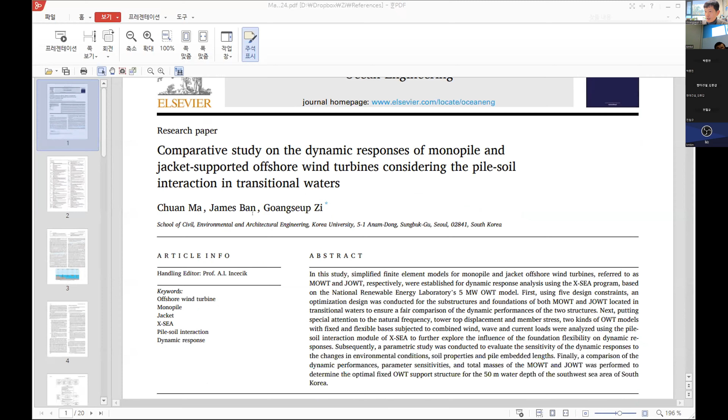강의 전에 X윈드를 사용해서 실제로 국제 논문에 발표해서 게재한 논문도 이 채팅방에 올려놨습니다. 다운을 받으셔서 실제 어떻게 사용했는지 한번 보시면 이 강의 외에도 부가 자료로 꽤 유용할 것 같습니다. 여기 논문에서는 통합하중 해석을 해서 고정식 구조물을 분석을 했고요. 구조물하고 기초를 따로따로 할 수도 있고 아니면 구조물하고 기초를 전체로 다 모델해서 지반까지 모델도 할 수 있습니다.

아까 말씀드린 대로 X윈드에서는 고정식도 할 수 있고 부유식도 할 수가 있습니다. 고정식은 검증 작업이 다 끝났고, 부유식은 검증이 남아있습니다. 이 논문에서 했던 거는 그림 6번을 보시면 되는데, 기초가 없이 고정된 타입하고 구조물하고 기초가 같이 부가된 타입하고 이 두 개를 모노파일하고 자켓에 대해서 전체 통합하중 해석으로 거동 분석을 했던 논문입니다.

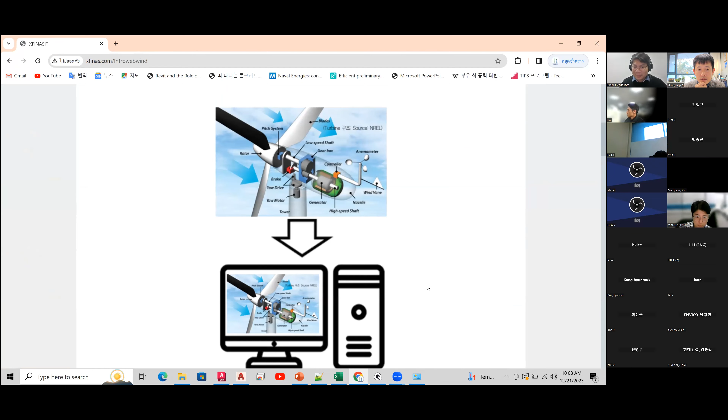Inside our website, there are some references you can access to download the presentations or the updated version of the tutorial manual of this demonstration. By the way, on the first or second page, there are details in the Korean language, so it can be easily understood clearly.

So let me turn to the homepage of our website. At the homepage, there is a link that you can use to download the program via GitHub. After you enter that position, you will see that I already provide the Xwin application version 2.01s.

So you can download it and extract the file into the storage folder. After you extract into the storage folder, for example, I already extracted it into the XC here. Please open up

some AutoCAD software and navigate to create a new drawing sheet. Please type netload at the command line and press enter.

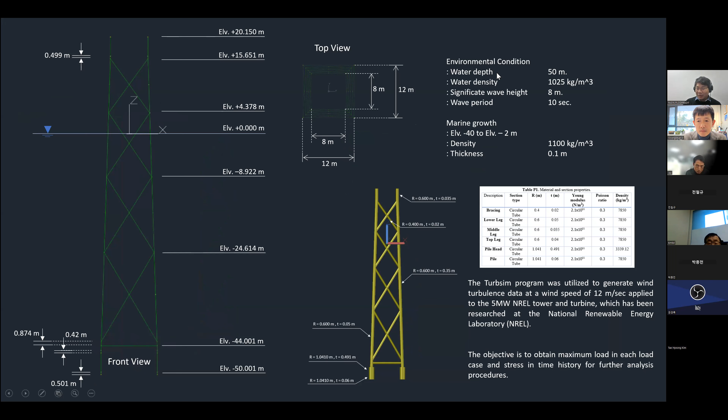This structure will be responding to the wave kinematics with water depth 50 meters, water density 1025 kilogram per cubic meter, and significant wave height allowed 8 meters. Wave period is 10 seconds, also including marine growth starting from elevation -40 to elevation -2 meters, with density 1100 kilogram per cubic meter, and thickness 0.1 meter.

So there are 2 types of material property and 6 types of circular tube section as shown in the table, classified by bracing, lower leg, middle leg, top leg, pile head, and pile.

The TurbSim program will be utilized to generate the wind turbulence data at speed allowed 12 meters per second, and applied on the tower and the turbine.

This kind of data will be published by the National Renewable Energy Laboratory, or NREL. The objective in this demonstration is to obtain the maximum load and stress in the time history for further analysis, such as FLS or ULS analysis.

So I think let's go to see the first look of the X-WIND program by running the AutoCAD software. I have 2 versions of AutoCAD, maybe I will use one version to start with you first.

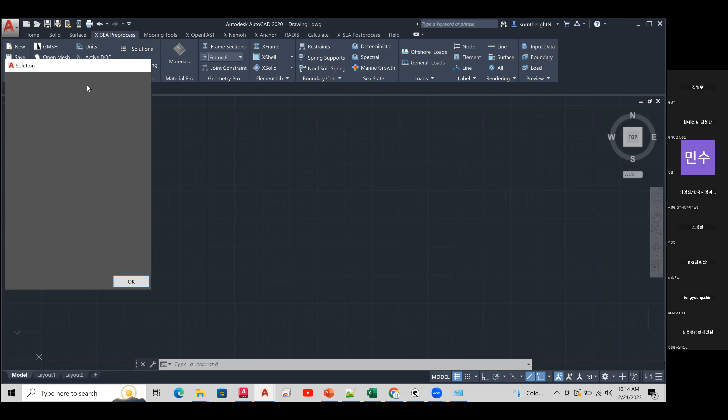We have many kinds of solutions from the analysis, like linear static, nonlinear, natural frequency, linear buckling, or many more. In this demonstration, we will use the open fast analysis, which allows the user to assign material property sections or group sections into lines of elements, and assign boundaries.

Okay, let's get back to the 2023 version. I think this is better. I will leave this one to be another work.

Before you start creating the model, you need to ensure the unit systems in AutoCAD are correct. Type the unit command and press enter. You can see that initially the unit inside AutoCAD is set as inch. That will cause a problem when we try to create the model I provide in the tutorial, because that model belongs to the SI unit and meter. So you need to change the unit to scale in insert content to be meter. Press OK to confirm. Finally, we already have it - this drawing sheet is considered to be in meter units.

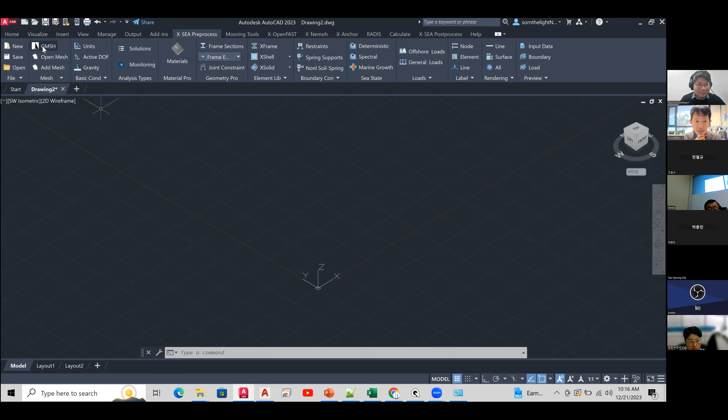Let's talk about modeling. We have three kinds of modeling methods inside the tutorial. The first is Line tool, a straightforward approach for generating lines using AutoCAD as provided in this demonstration.

You can navigate to the Home tab and select Line. As you see, it will request you to specify the first point. After you input something for the first point, it will request the second point. Or you can drag and drop it on the screen as you want.

To construct the whole jacket structure, we have allowed 112 lines to construct it.

I already have provided this in the appendix. Dr. Pasin? Yes sir. Sorry to interrupt - can you slow down the speed of your lecture progress so people... Okay sir, yes sir, if you go too fast I have difficulty following.

Okay, so let me repeat again about Line tool. Especially when you navigate between different options, you should navigate to the Home tab. This is the first method for the modeling technique - a very simple method, but much more difficult to complete the whole structure this way. You can navigate to the Home ribbon menu of AutoCAD and select the Line icon.

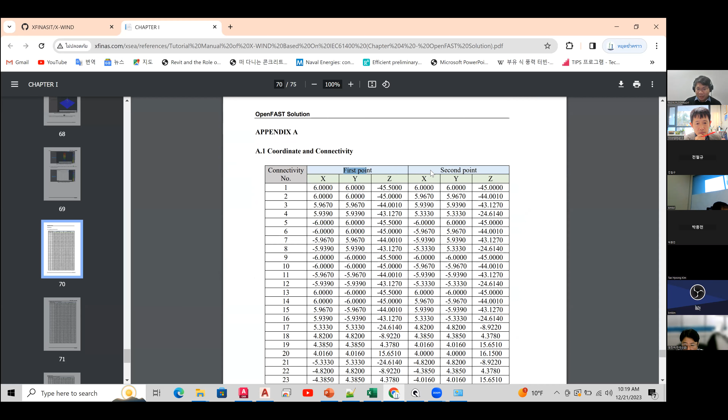But for the whole structure, if you try to use this kind of method, there are 112 elements. In Appendix A1, page number 70 in the updated version, or page 66 in the old version, I already provide the first and second point coordinates. You need to fill up everything to complete the drawing - that means 112 lines to complete the jacket structure. This method consumes a lot of time, so I do not recommend it for this demonstration.

I have another, second method. The second method is to use the AutoCAD command to construct the specific model by using AutoCAD. So you can go to Appendix A2.

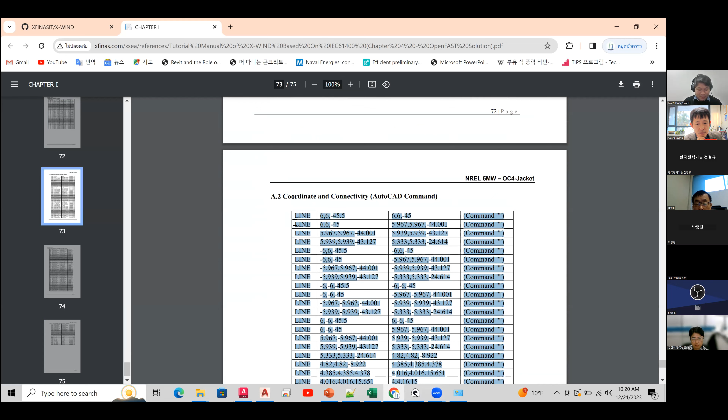You can see they have contained around 3 pages. Easily, just copy the whole of the first page. By Control+C, and then go to AutoCAD. You can see it on the command, and press Control+V. Now the jacket model starts to make automatically. After you finish, just press ESC to cancel or escape.

So you need to fill it up with page number 2 and page number 3. This is page number 2 for the command to make the drawing. See that? Now this is almost completed. Let's go to page number 3.

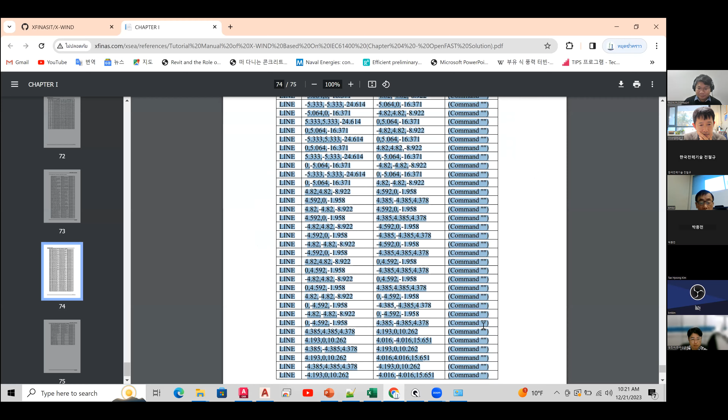So finally, we already got the completed one on the jacket model. By the way, an additional method is the third method. We use the jacket template, but please do not follow me in these steps, because you already have the model, and we would like to go into the classic method, not the advanced one. This is more simple and easy, so we navigate to the X-SEA Preprocess ribbon.

Please do not follow. Can you see it's on the file category? Extend the file category - we have the template extended. It will include the jacket template, monopile, tripod, and tetrapod. Can you hold a little bit? I'd like to explain what the current stage is.

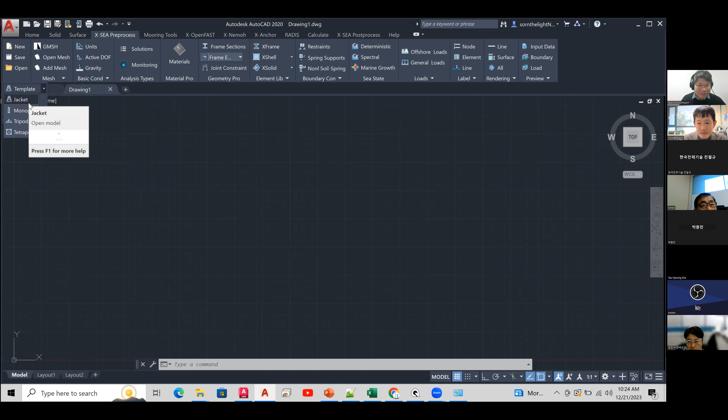Okay, let's go the very simple way to build the jacket, relying on the manual detail. If you refer to the manual, page 10 for the new version of it, 01 is...

should be 6. You can see that I already provide information to make the jacket by using the template. So if you follow this kind of table, you can build the jacket easily by putting the number of stories equal to 11. Base width is 12, offset is 2. Then you should fill up all the table on story number 1.

Let me fill up everything and I will show you.

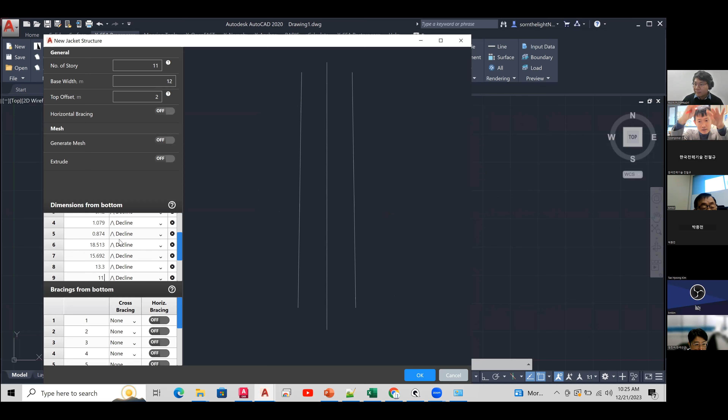Okay, let's make a straight line on the floor, number 1, 2, 3, and then 10 and 11. So we create the horizontal line to floor number 4, and cross number 6, 7, 8, and 9.

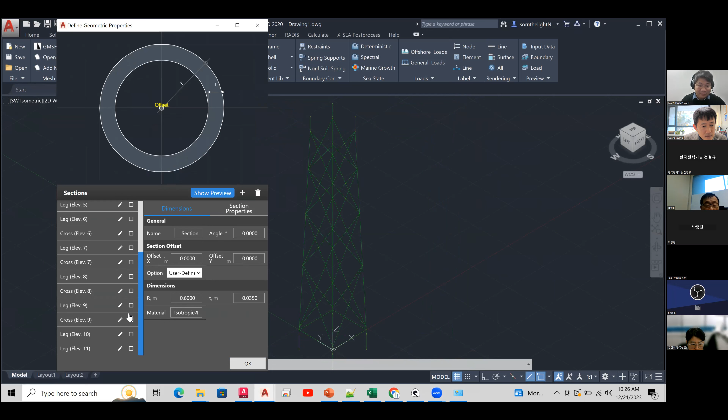So now we already complete the jacket model by using the template, and can pass it to the mesh by using the count number 1 and create it. So finally, we already have the jacket modeling, and it automatically inserts the data into the geometry side. That means the list of details in the geometry section will be initialized, but you can modify it later.

Okay, this is the third method, but by the way, we need to go to the classic one. I will close this one and use the 2023 version instead. So I think everyone has already completed the model.

To generate the mesh, we need to select the entire model that we would like to generate the mesh for, by using GMSH. Navigate to the X-SEA Preprocess, move it to the mesh category. As you see on the first icon that they show on GMSH, click for that.

Can see that the model that you modeled in AutoCAD will be loaded into the GMSH software. On the left panel, they have the data tree to control the mesh size and define many things more. Please extend the mesh, extend define, and extend transfinite. Now we get to the curve.

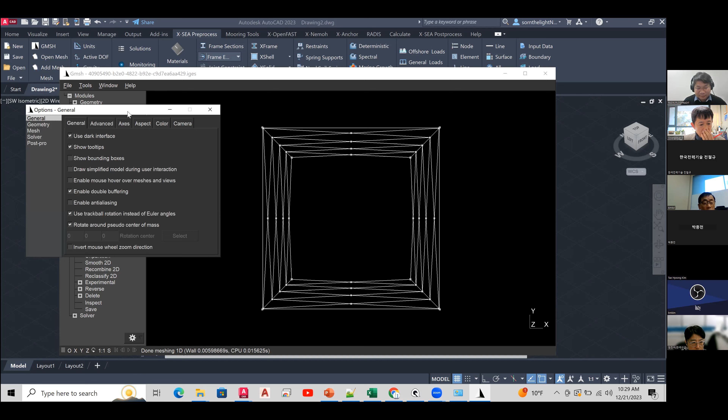They have the mesh. See the element label. That means the number of the mesh has been generated completely. Or we can check by the node label also.

Okay, if everything has been confirmed, close it. Navigate to the file, save mesh.

So we need to turn off the program by navigating to the files once again and quit it, or you can close directly.

So we need to open the mesh that we have generated. Navigate to the X-SEA Preprocess ribbon, and you can see it's on the mesh category.

They mentioned our icon name, open mesh. Click that.

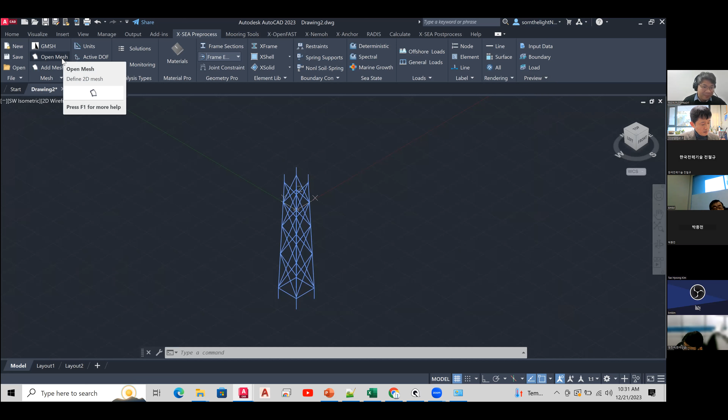The model has been drawn completely with 64 nodes and 112 lines.

Okay, let me summarize up to this point. Yes, sir, so you built the computational mesh now. So you have space for the finite element meshes at this point.

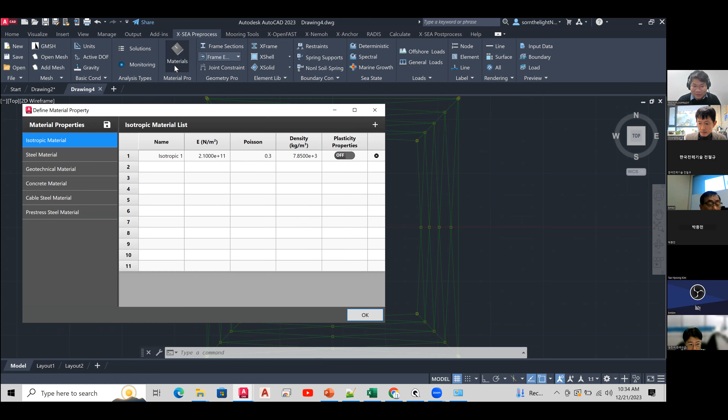In the isotropic, we already initialize the first value of the material. You can add one more.

You can see it's on the top of the screen, they have the plus symbol. Click to add one more material property.

You can fill it up here or in the table, it doesn't matter. For example, I will fill or change some value in the table. That's why I just insert the data here.

Change the isotropic name as you prefer. I will change it to just read number 2.

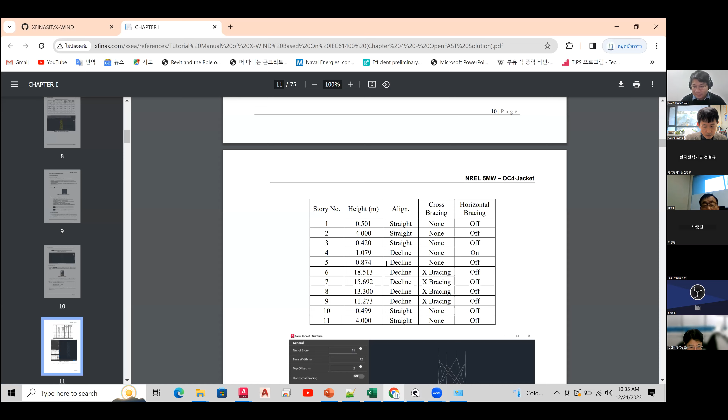With their second, density has been changed to 3339.12, as referred to the tutorial on page 17.

Because that is still unchanged, by the way, the Young's modulus elastic is not changed, and the Poisson ratio is always 0.3.

Okay, I assume that everyone has finished. Just cross or press OK, it doesn't matter.

Next, we will go to assign some section property. Navigate to the frame section at the geometric property category. Click on the frame section.

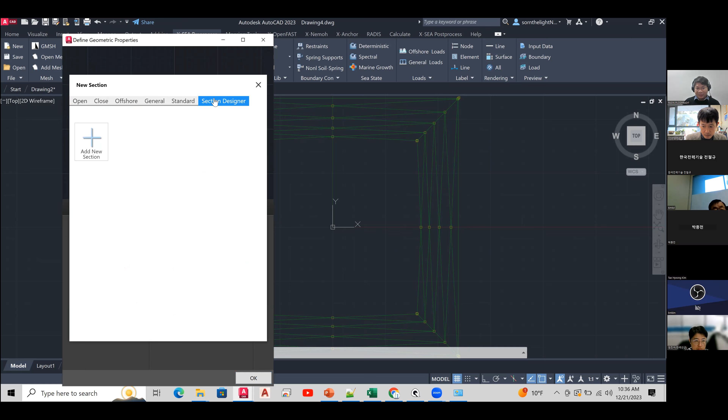You can see that we have many types of section property: closed, offshore, general section, or the section designer. In this jacket, always use the circular tube.

That means go to the cross section, navigate to the circular tube, and click it. The first thing they will request is

to input the names, so we can use any kind of name that we want. For the first section, I will follow the table I have been using in this tutorial. You can see it's on the table here: the first name is bracing, second is lower leg, third is middle leg, fourth top leg, fifth is pile head, sixth is pile.

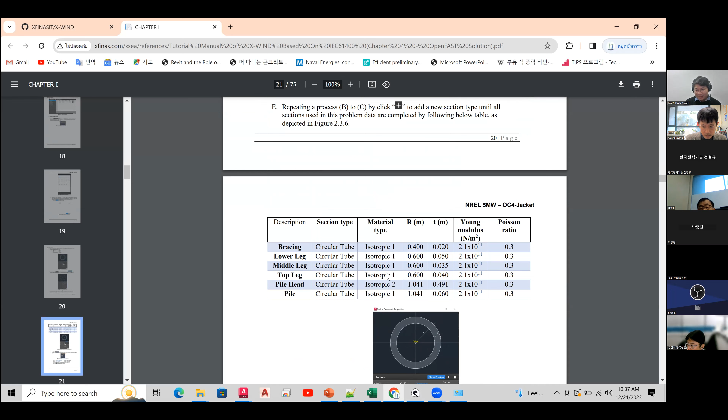I will change the name to the bracing. Press OK to confirm the name of the section. Here you can put the radius. It should be 0.4 for the first one, and the thickness is 0.02 meter.

After you input until this step, on the middle of the screen, not the top one, you can see the show preview option. After we click on show preview, it shows the real section shape, and you can also hide it.

Below that, they have the dimension and section property. You can double check by clicking on the section property, to check the properties of this kind of section, like area, torsional constant, moment, polar moment, and first and second moment of inertia.

To add one more circular tube, where it's located near the show preview and hide preview, there is a plus symbol. Click there, choose cross sections once again, and navigate to the circular tube.

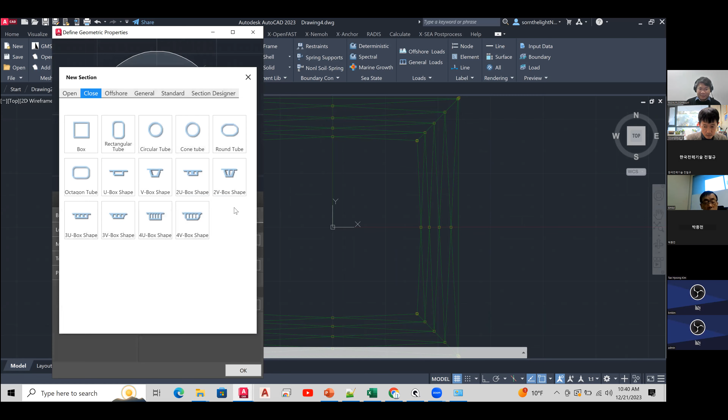Next is this last one for the pile, with isotropic 1, radius 1.041, and 0.06 thickness.

So everything now has been completed to define the geometry property. You can close and terminate this window.

I will navigate to the X frames so we can assign properties to the lines of the model we have done before. Please navigate to X frames in the category of the element library, and you can see the X frame there.

I will start assigning from the bottom to the top. That means X frame 1 has been defined as the pile first. Choose the cross section to be the pile.

Then we need to rotate the model a bit to make it more clear. We go to the top of the AutoCAD working screen and change to the southwest isometric view. This is more clear for me, but it depends on you guys.

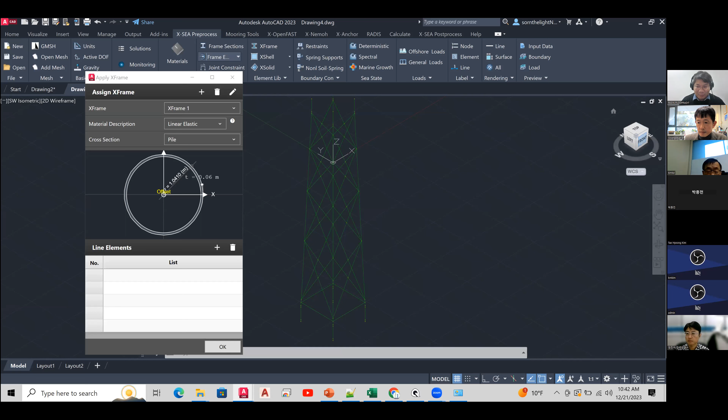On the right-hand side, there's a cube that can be rotated with the model. I will change to the front view instead, then zoom in to the model at the pile. You can see the yellow box that refers to the node.

To group up the pile, you can use the AutoCAD tool by dragging from right to left. Select just the last bottom line. If I rotate a bit, you can see that 4 lines have been selected. That's why I rotated to the front, it's easier to work on it this way.

Go back to the apply X frame window. You see the line element, in the middle of the screen, on top of the table, there is a plus symbol. We need to add the data here by clicking on the plus symbol. Now line number 1 until 4 have been added into the table.

Let's create X frame number 2. On top of the assigned X frames, we have a plus symbol. Click that to create a new one. You can change the name to whatever you want, but I don't want to change it, I'll just use X frame instead. Press OK, and they will request to assign another.

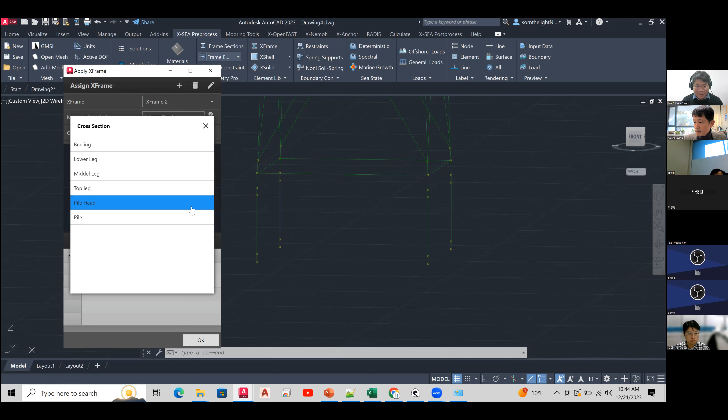Choose the section to be the pile head. Let's turn back to the front view. The pile head location is next from the pile. It's the same thing, we select the 4 elements and add it into the table list.

Okay, now next we move to the X frame number 3. Choose on the top leg. Sorry, should be on the lower leg.

Turn back to the front view and zoom it up. You can choose this kind of the 2 leg and more here on the top of it. Rotate a little bit. Choose on the...

1, 2, 3 more, 4 more. That's mean the total in this lower leg have include around 16 element or 16 line. Add it into the table list.

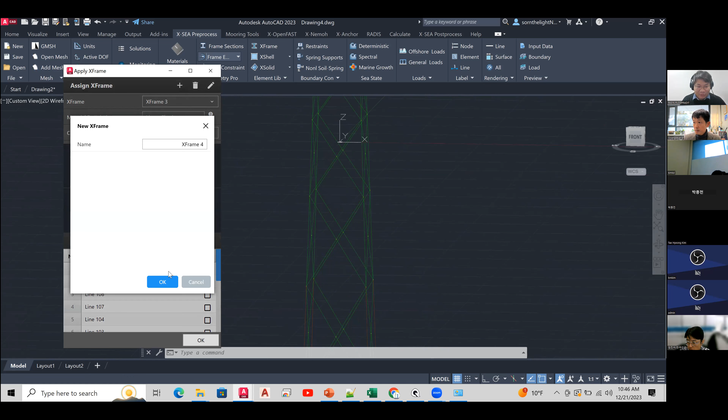Okay, let me shift it, move up. For the middle leg, additional for the X frames, choose on the middle leg of the cross section. This middle leg we need to shoot by ourselves because we cannot use the front view.

If we choose use the front view, it will be select on the bracing. That means we need to select 1, 2, 3, 4, up. Another story. And 4 more, almost near the top.

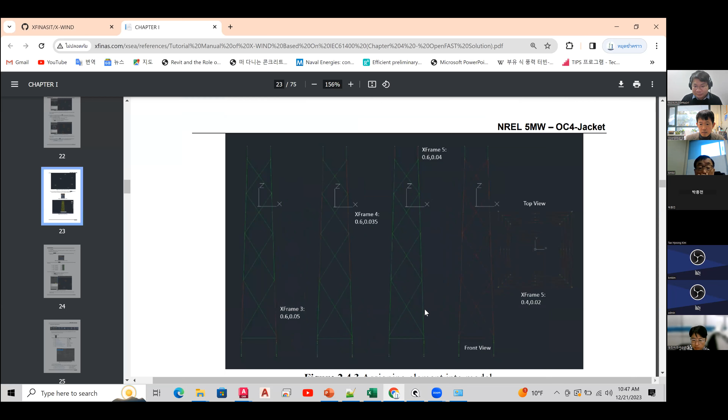Actually, if you see it's on the tutorial, I have been provided a location that you can select easily here, by its location to be point to the X frames of the bracing lower leg, middle leg, and top legs or so.

Add it into the table list. We move to the X frame number 5. That's mean shoot on the top leg.

So finally, we go to the last one of the X frame. Choose on the bracing. That means they already selected for me because they initialized for the first one. Choose on the bracing. I use the front wheel to select whole.

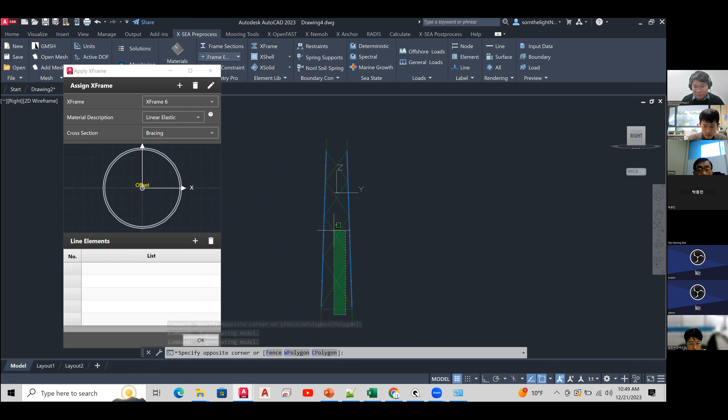Rotate it by using the right. Choose once again. Okay, that means whole of the bracing has been chosen. Add it into the table list.

Up until now, if everything has been done successfully and has been complete 100% without the problem, you can close the window. Go to the rendering window forms, that category inside the rendering.

You can see it's on the line. Navigate to that. Click it to be rendered about the 3D shape. If shapes have been corrected, it will be rendered like this kind on the screen.

On the AutoCAD, they provide some kind of option to see the view very clear. Left-hand side of the screen, they have the 2D wireframe here that is belong to the AutoCAD. You can change to any kind of the display, like a realistic. That just mean much more clearly to see it.

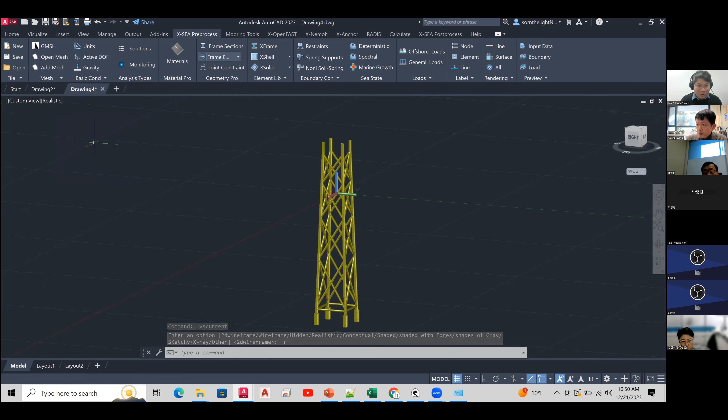Or the shade of the gray. Okay, let's go back to the 2D wireframe and turn off by clicking once again at the line. So it's almost final in the X-SEA Preprocess.

The last one is the boundary condition that we need to enter for the fixed offshore structure. Let's back to the right for me. Navigate to the boundary condition category.

Can you see it's on the top of the icon? They refer to the restraint. Click that window up.

We need to lock the translation and rotation because this is the fixed offshore, by turn on U constraint to be locked V, W, X, Y, Z.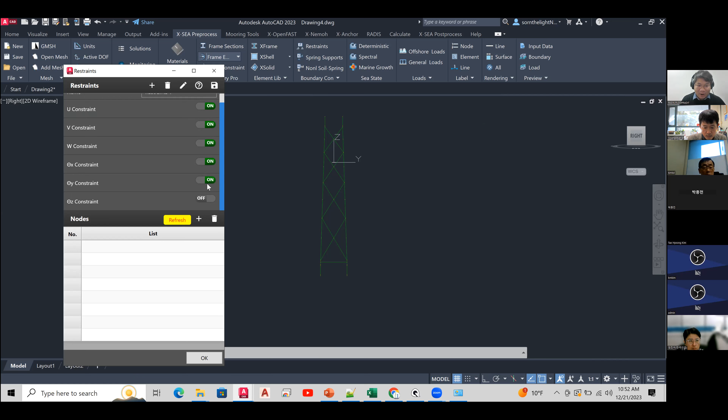Zoom up to the bottom of the structure. You can see it's on the node with the yellow color, rectangular yellow color. That is the node. You can group it.

That means two cones refer to the rotation. One cone refers to the translation.

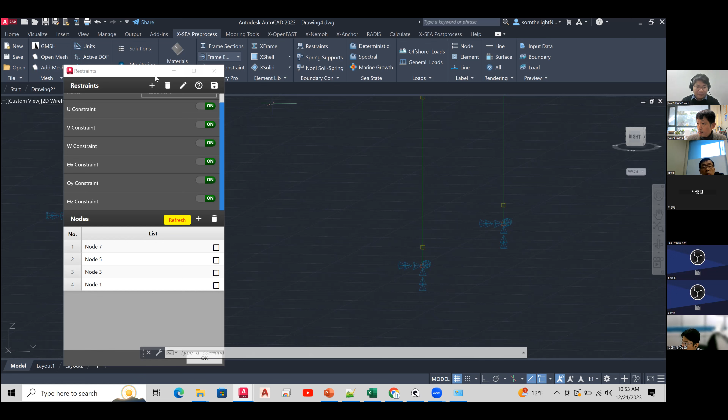Okay, finally, everything has been complete on the X-SEA Preprocess. We can move to the X open fast. Let me just return to the original wheel.

Now we get to the X open fast ribbon menu. After you click it, they have a lot of the icon in the front of it. You can see it's on the pre-process first. Normally, the pre-process of the OpenFast will be controlled by the primary control.

The primary control has used to be control the main solution and control about the file system that used inside the couple analysis. So the first other thing we need to define on the primary control.

They will separate on the right-hand side and the left-hand side. The right-hand side is used to insert the data and choose some kind of parameter. The left-hand side is some kind of category in this icon, like on the primary control, we have allowed 5 categories to be filled up.

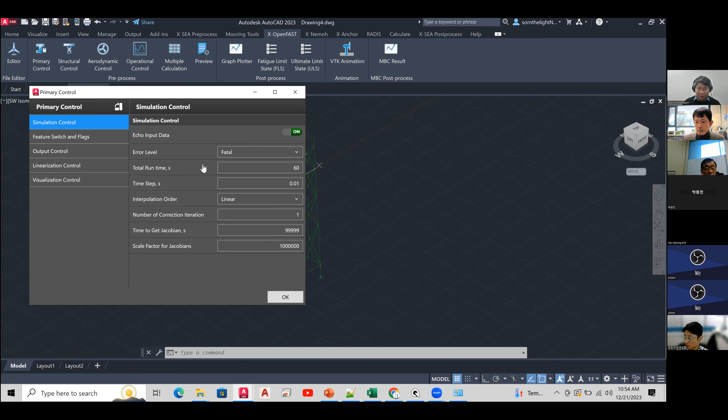So first, go to the simulation control. You need to turn on the echo input data, that means it will be within the results. I recommend choosing the error level as fatal, because if you use the warning, it didn't break the program and didn't show any kind of message much. The fatal option is much better to break the program and show the error when you try to analyze it.

Total running time, I recommend nowadays just 60 seconds is enough. And the time step for the analysis on the wind turbine, now just 0.01. Choose the linear interpolation order as quadratic. Number of correction iteration times Jacobian, you can leave as it is.

So if you cannot follow, you can go to our manual that is online in detail. Here, we go to the primary control. That's what we need to choose.

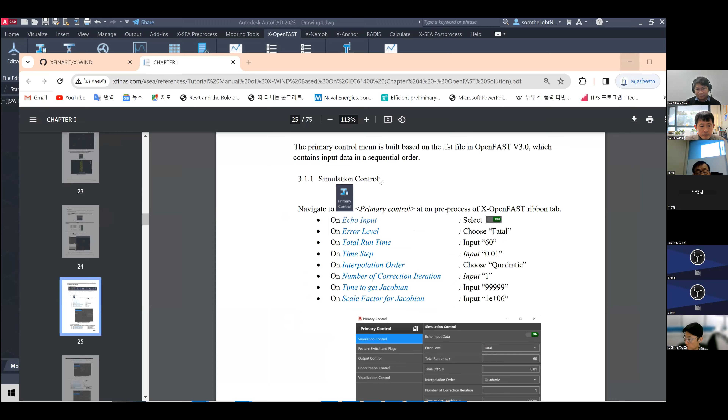Next, feature switch and flag. This is the main control for how many modules you prefer to use. Compute structural dynamic - we always use ElastoDyn because ElastoDyn always controls the tower and the main controlling for the turbines and nacelles also. We need to turn this on and choose ElastoDyn. Normally that's already initially set for ElastoDyn.

Second is the inflow wind velocity. We use the turbulence data from TurbSim. Please choose the inflow wind.

Aerodynamic - this is the 15 version. Yeah, just a single one that we need to turn on. And ServoDyn should be chosen, that is the electrical driving system or gearbox data.

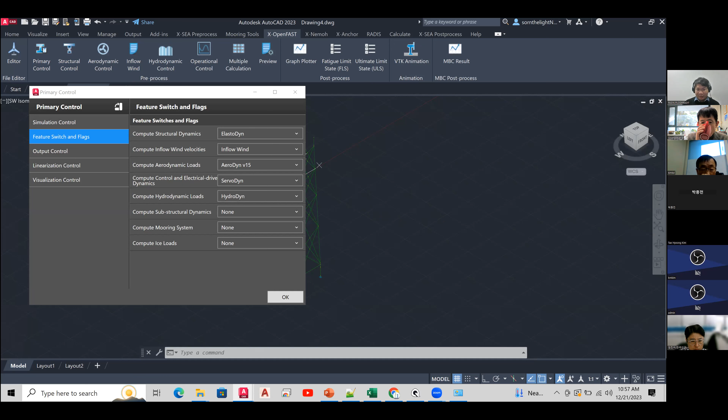On the compute hydrodynamic load, please choose HydroDyn because we need to consider the wave kinematics. We have the substructure, right? The module we use needs to be requested on SubDyn. So the mooring system is not required and the ice loads also, because the mooring itself connects to the floating structure and the ice load - we didn't consider that in this demonstration.

Can I break at this moment? Yes, sir. To summarize what you say.

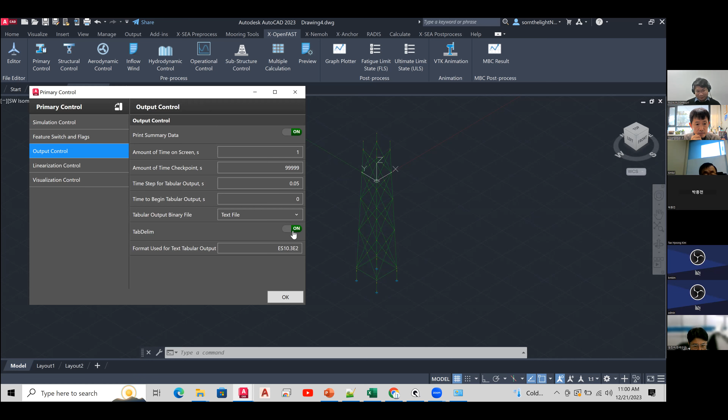Okay, the linearization is not required in this step. We go back to the visualization control. The visualization control, or the VTK itself, is used to make the animation.

To use the animation, we need to turn it on by choosing the animation at the VTK visualization data output. After you choose it, it requires what data you would like to be printed for the animation. In this step, I recommend to be shown on the surface.

Let's go to look at the frame rate for the VTK output. This is a very important thing because it's a frame rate per second. So if you include a lot, like 100 or 1,000, it will consume a lot of space.

Actually, this kind of analysis nowadays, we run around 60 seconds, with the time step at 0.01. With the VTK file in the VTK, with the video animation, that's consumed around 3 GB already. So just leave it at 15 as is enough.

By the way, what does VTK stand for? It's just animation, visualization control.

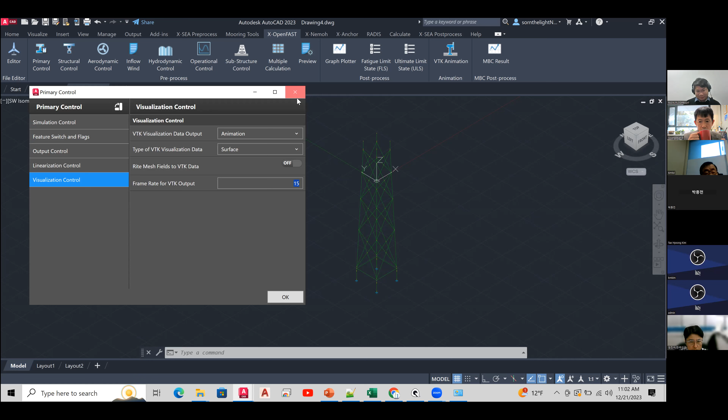Okay, just turn it off. So after you normally complete the feature switch and flags, the ribbon that is required to input inside OpenFAST will be coming. That means you need to fill up everything on the structural control, aerodynamic, inflow wind, hydrodynamic control, operational substructure control. So I will show you one by one.

So let's go to the next, on the structural control. Normally, as I explained, everything is almost set for the 5 megawatt NREL turbine already. But that setting is based on the monopile, not the jacket structure. Some data should be adopted and adjusted.

So we can go to the simulation control of the structural control. You can see the integration method. They have three types of it. We need to choose the Adams-Bashforth-Moulton fourth order. And just leave the integration time step as the default, meaning it will follow the time step on the primary control.

Can I intervene a little bit here? Yes, sir. I'd like to switch the screen share to mine.

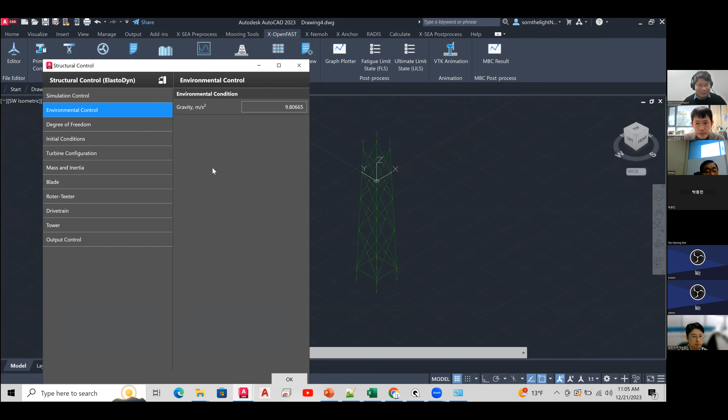So next, go to the degree of freedom that I already mentioned, because everything has been set. You need to turn on the blade DOF because we consider the blade, nacelle and tower, but should be turned off on the rotor teeter. That one is used for the two-bladed turbine.

After turning on everything, you should also turn on the platform DOF, because it includes the 6 degrees of freedom on the platform, meaning on the substructure itself. That means you don't need to touch anything on the degree of freedom except you change the fourth thing that should be considered.

For the initial condition, they allow control of the blade pitch angle and some kind of angle on the blade itself and on the tower. The rotor speed we set for 12.1, which is great enough for the operational speed.

That means it's not required to be changed. But as I mentioned before, this kind of setting is made for the monopile, not for the jacket. That means on the platform, we need to modify it. But on the top of the tower, everything is not required. So you can see on the platform, the vertical height should be adjusted to minus 0.227, as I remember, maybe. Yeah, that is correct, 0.2 for the platform vertical height direction.

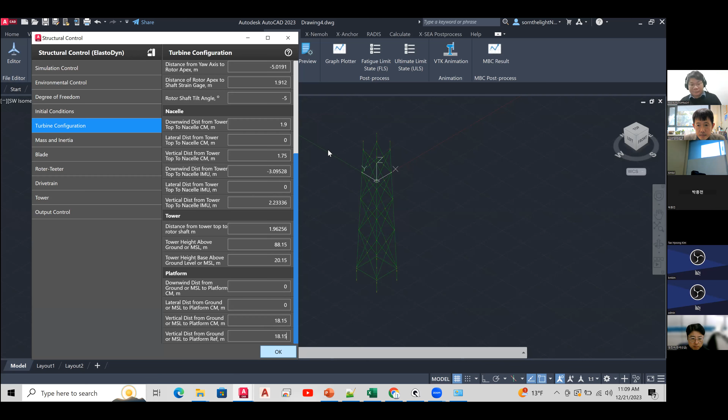So you would like to know about the blade pitch angles, right? Normally the blade pitch angle is just like the angle that the blade acting on the nacelle. If you would like to see it in more detail, I recommend it.

Let me go to... here. I think this is much more clear for the pictures of the blade pitch angle.

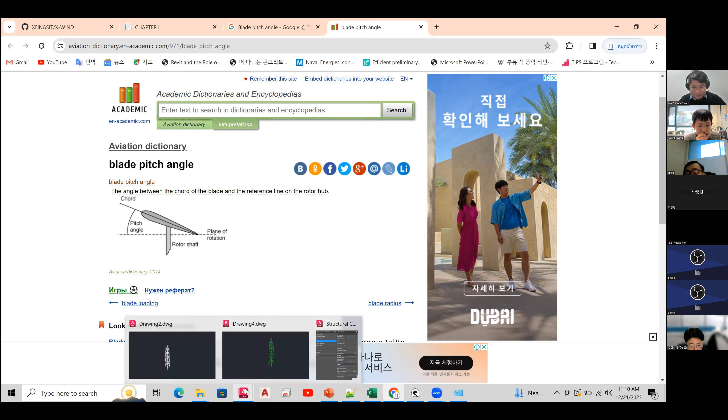Okay, if everything is clear, I will continue to the mass and inertia. Normally, mass and inertia has been used to be input by the user, just like the hub mass or the nacelle mass. That means the nacelle itself should contain the gearbox or other things.

But by the way, this is the NREL 5 megawatt. Everything is already fitted, except the platform should be changed because we didn't set it for the jacket. That means platform mass, it should be 666 ton should be input belonging here.

And about the platform initial roll inertia, if you follow the manual, that should be put in 6.002 x E power 06. It's the same thing with the platform initial for the pitch inertia, 2 x E power 6.

Now, finally, we can input the data for the inertia for the yaw inertia, 1.0229 x E power 7. So the mass has been conducted completely.

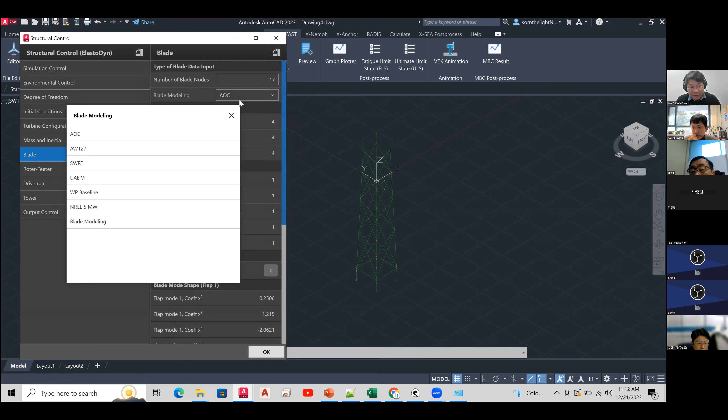Let's go to choose the blade type. We already integrate some kind of certification test from the NREL. That means you can choose the type of the blade by using the AOC blade, AWT27, SWRT blade, UAE VI also, or the WP baseline. That is the name of the blade. But that is very small. AOC maybe just 1.5 megawatt, as I remember that.

But in this demonstration, I will use just the NREL 5 megawatt blade. That means you can choose the NREL 5 megawatt blade here. After you choose it, every data layer, some kind of the stiffness coefficients of the blade, it will be inserted automatically.

So the rotor teeter is not required because this is three-bladed. And the drive train, we can leave as is here, just like the control about the gearbox efficiency.

Tower, we have a lot of types of the tower related with the certification test. So you should change here to be the 17 node. That means along the tower, it will be divided into 17 nodes or 16 elements.

Choose the tower option to be the NREL 5 megawatt jacket. We have many more. You can see that we have the 5 megawatt for the monopile, tripod, even for the floating structure. So the easiest way, just go to the jacket.

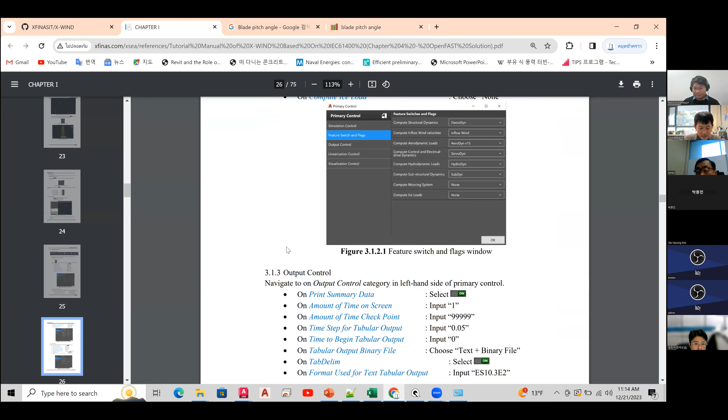Maybe this term is a bit confusing because it's related to the channel list itself, to reduce your config. Normally this kind of channel list is provided by the NREL parameter. That means you can go to the OpenFAST document, search for the OpenFAST document on Google, and you can see they refer to the document in the online documentation.

Navigate to the user document. You can see that they allow you to download the output list parameter.xls. You can download it there, and after downloading, you can see that they have a lot of the channel list resolved that we prefer to get.

But our target is we would like to get the tower base only. That means you need to put the channel list TWRBSFXT. Three of them are for the force, and another three are for the moment.

If you return back to our tutorial, we already provide the tower base here for the channel list. You can copy just these two lines, or the whole of it, it doesn't matter. But for the whole channel list, you need to connect it with the bracket list, so that's why I do not recommend it nowadays, because it will make you confused. I recommend you to copy just the tower base.

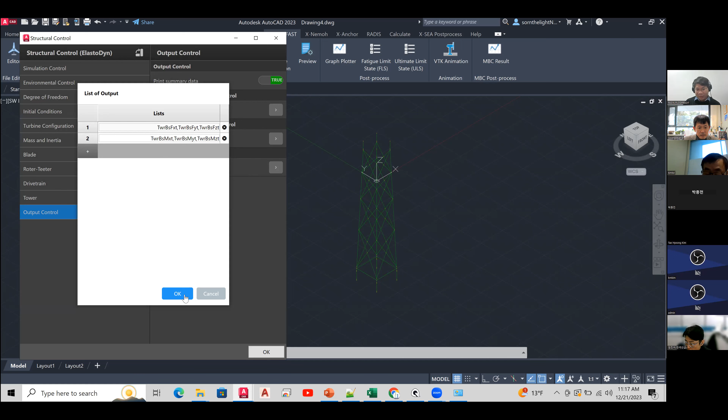But by the way, in the first line, we already have the name of the data list initiated, which is not required, so you need to delete it. That means the output will refer to the tower base force and moment in X, Y, Z direction. Press OK to confirm once again, and OK to turn off the structural control.

Now let's do the aerodynamic control. In aerodynamic control, we control the systems or the theory dealing with the aerodynamic force. There are many more on that theory, like wake-induced force or something else.

So first, you can go to the general option. Change the type of the wake-induced model to BEMT, that's it, and everything else can be left as chosen. It's set automatically, like the airfoil that uses the Beddoes-Leishman model, and the tower influence includes the baseline potential flow theory.

Next I will move to the environmental condition. The environmental conditions already specify the air density, air viscosity, speed of sound, atmospheric pressure, vapor pressure, or fluid depth. That means you can leave it, everything is already set, unless you would like to change it.

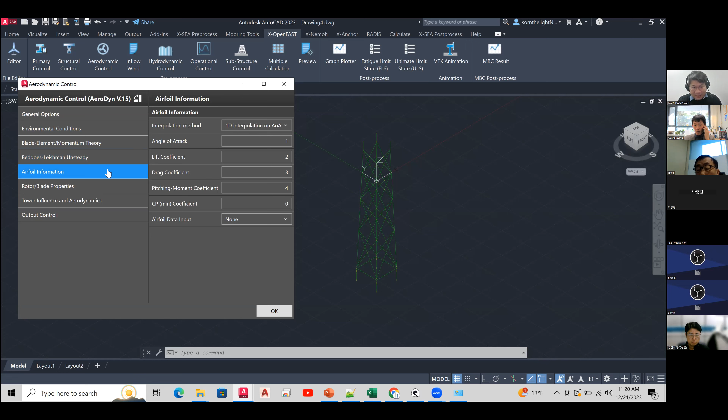Next, we go to the airfoil information. It requires some kind of coefficients: angle of attack, lift coefficient, drag coefficient, and pitching moment coefficient, which has been set at 1, 2, 3, 4, already corrected, and the CP min coefficient that should be equal to 0. Yeah, that's correct.

Choose the airfoil information data input as the NREL 5 megawatt. Normally they have a lot of airfoil coordinates, normally dealing with the airfoil coordinate. But if you have an additional airfoil coordinate, you can use the airfoil browser file and browse an external file that you have. By the way, if you don't have that kind of file, you can use ours, just like the NREL 5 megawatt, which refers to just 5 megawatt, or else just choose the NREL 5 megawatt.

Then next we navigate to the rotor/blade property. The blade property itself is always the same thing because we already provide it for the NREL 5 megawatt, that means you can choose it without a problem. And please turn on the use BEM also.

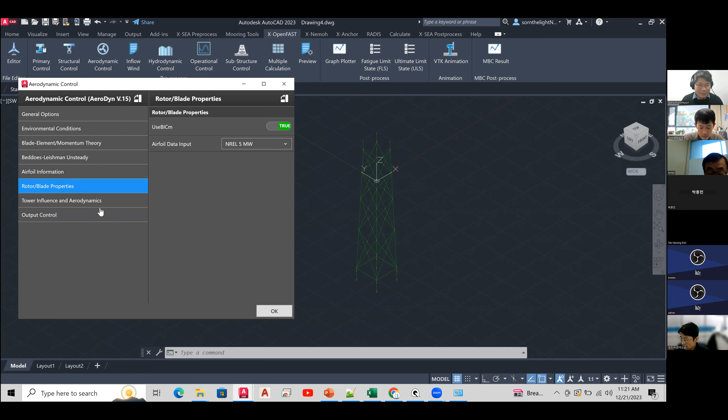Okay, let's next go to the tower influence. It's specific about the tower data, like stiffness, that's used in the aerodynamic control. We can choose it for the NREL 5 megawatt jacket, and you can see the specific input with the elevation is coming. They refer to the drag force and turbulent intensity.

Okay, please confirm. I think we don't need to deal with anything on the output channel list in the aerodynamic control, because we're not required to get any kind of force from the aerodynamic. So we just cross it.

Just navigate to the next icon, the inflow wind. The inflow wind is used to choose the type of wind profile. We have a lot of wind profiles here, like steady wind, uniform wind, binary TurbSim. The binary TurbSim file and binary Bladed-style FF are almost identical — that is the turbulent intensity data. So as I mentioned in this demonstration, we use the turbulent wind data from the TurbSim, so we need to choose the binary TurbSim FF.

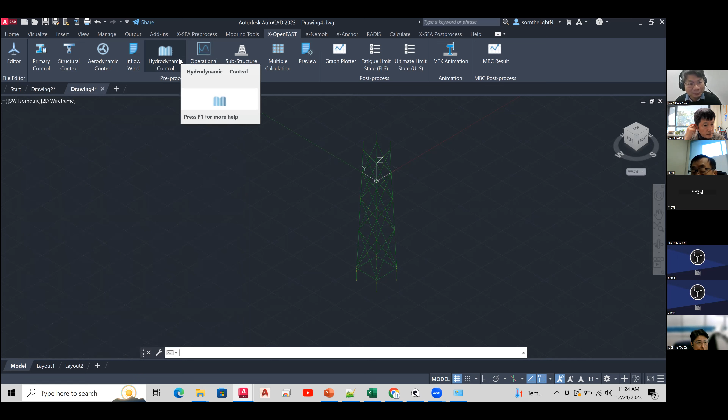Okay, next is a very important thing — the hydrodynamic control. Hydrodynamic control is used to control the data or parameters of the wave kinematic. We navigate to the environmental condition. Because the water depth on the jacket is 50, you need to change here to be 50 meters.

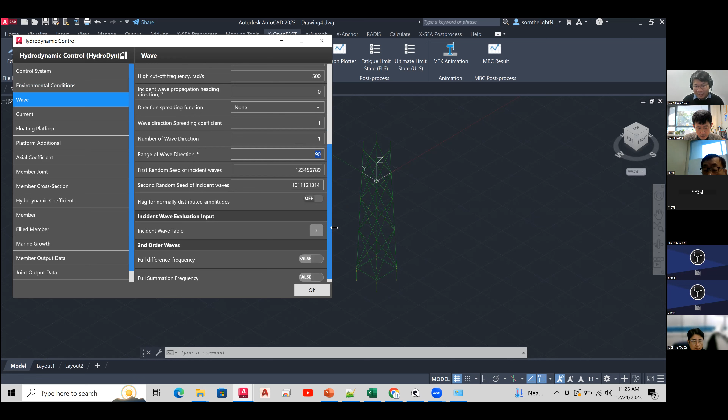Low cutoff frequency is 0, high cutoff frequency is 500. The direction is 0 angle — this is enough. Range of wave direction is 90, and we need to change the random seed to be text, like RanLux.

Okay, up until here, it is not required to input anything for the second order wave — that's for something else, by the way. Current in this model is not required.

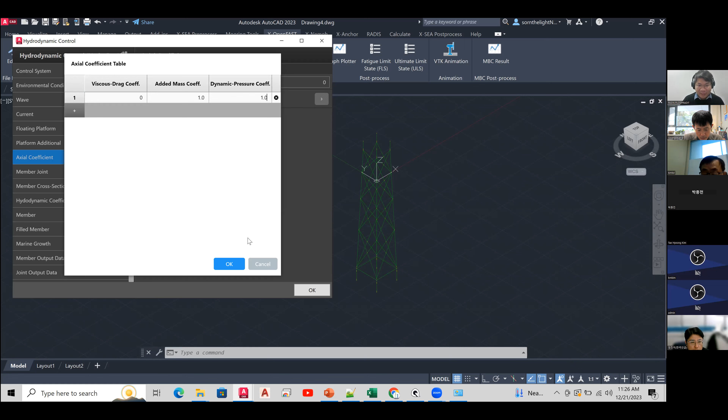After you fill in the information in the table list, you can press OK to confirm and put the number of axial coefficients equal to 1, because you have defined this table as one data — that means you put the number 1 here also.

Next is the number of member joint. Normally, for the member joint, we have two kinds of methods to make a modeling: with the model and without the model. In this step, we already start with the model, so everything from the model that we made at the beginning will come through here.

As I mentioned, this jacket structure contains around 64 points of nodal joints, which have already been inserted automatically. If you go to the table, you can see that every coordinate referring to the node point is already inserted with the axial coefficients ID.

But the axial coefficients ID in this step needs to be considered with the period one, to be mapping between the axial coefficient ID and the member of the joint. For the entire structure, we use just one axial coefficients ID, number 1, so everything is set equal to 1. Joint overlap may not need to be referred to in this step.

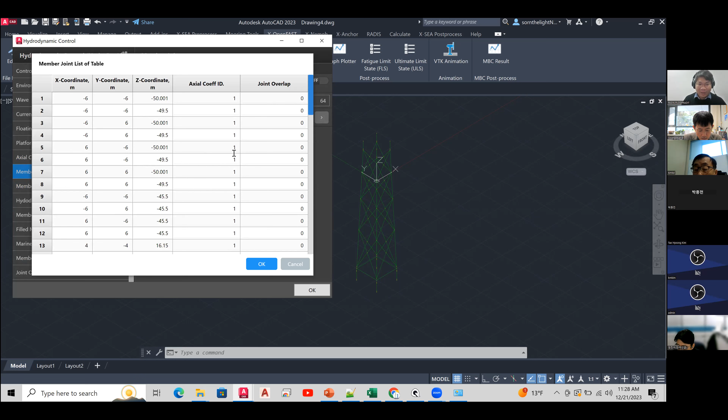So we go to the member cross section. This is not required either because we defined it at the beginning. Every cross section we defined inside the frame section will be inserted here. The total number of cross sections is equal to 6, with diameter and thickness. We can press OK to confirm without a problem.

Hydrodynamic coefficient - here we control the drag force and some kind of pressure, drag and mass coefficients. We will use the simple hydrodynamic coefficient. Everything should be equal to 1, meaning you can put here equal to 1.

Once you've filled this step completely, we can go to the member. Member also is not required to input because we've already completed the model - the member itself is referred to the element. If you see the member list table, everything has been filled up.

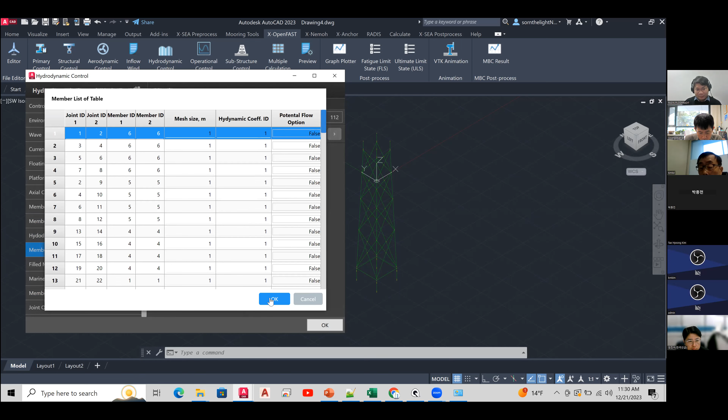Let's go next to the filled member. The filled member is used to fill the water inside the circular tube, inside the model normally.

In this stage, you need to navigate to the X-SEA Preprocess first because we need to use the number of elements to fill everything up. Navigate to the X-SEA Preprocess. On the label, we can click on the element to let the program show the element label. If you follow the manual, I have marked it.

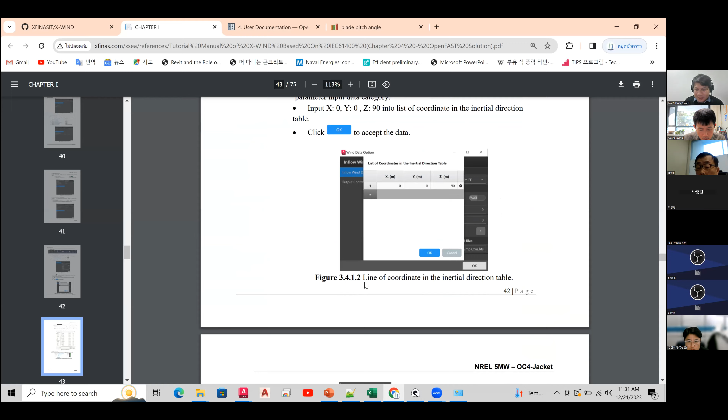Where is the location that we need to fill with water? That means it belongs to the leg of the structure - the bracing is not to be filled. So you need to construct and read the number from here. That means you can see we need to fill number 1, 2, 3, 4, 5, 6, 7, 8, right?

But by the way, if you use the same method as me, you can follow this number that I referred to in the manual.

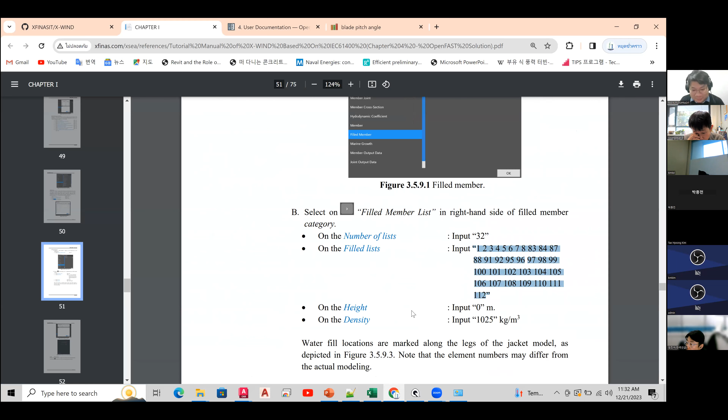So the number of the filled group should be equal to 1, meaning the number of legs is equal to 32. The number list is 1, 2, 3, 4, 5, and following the manual, 6, 7, 8, 83, 84, 87. Let me show it: 88, 91, 92, 95, 96, 97, 98.

With the height equal to 0 and density 1,025. After we've completed this, we can press OK, and please refer to that - we already filled the number equal to 1. Please input number 1 here.

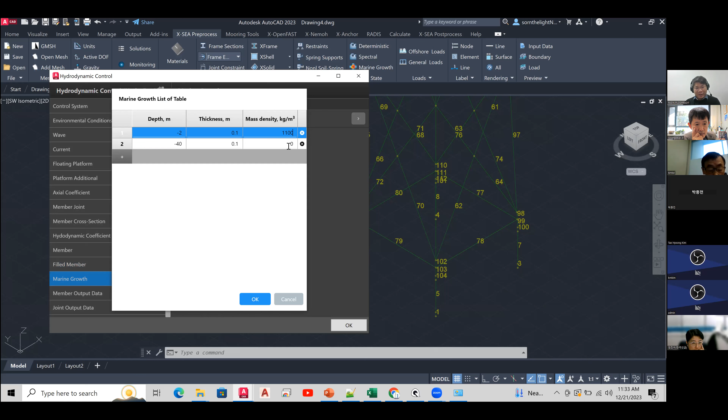Next, navigate to the marine growth that we mentioned before. We have to account for marine growth starting from elevation -2 to -40, with thickness 0.1 for both. Mass density is 1,100. That's it for the marine growth.

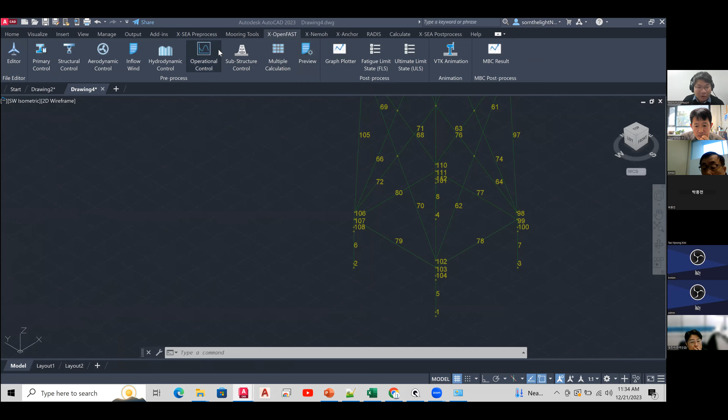So let's navigate back to the OpenFAST ribbon menu, the almost final one. This is the operational control, where we control the gearbox and electrical systems.

In the simulation control of the operational settings, please turn on the echo input data. Navigate to the pitch control and choose the bladed-style DLL. Everything is already filled up about the pitch maneuver data for the 5 megawatt turbine. Go to the generator and torque control - everything has been fitted, no need to be changed.

High-speed shaft brake control may not be required in this model. The bladed interface is required for the dynamic link library from OpenFAST. That means everything has been set, so nothing is required to input.

The final one is the substructure control, which is in the first of the simulation control categories. We need to change the integration method to the Adams-Bashforth-Moulton fourth order, going to the finite element method.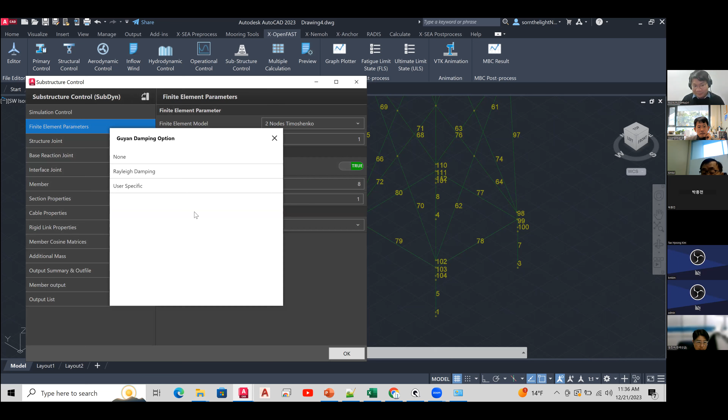Guyan damping is just user specific, using the 6x6 method.

Insert into the table at point column 3 and row 3, by the value 1.0661 times 10 to the power 6. Press Enter to confirm.

So we don't need to deal with the structural joints because everything from the model has already been inserted here. The base reaction joint is also the same - one has been referred to as locked, meaning everything you defined from the beginning in the X-SEA preprocess is automatically inserted here. No need to check it.

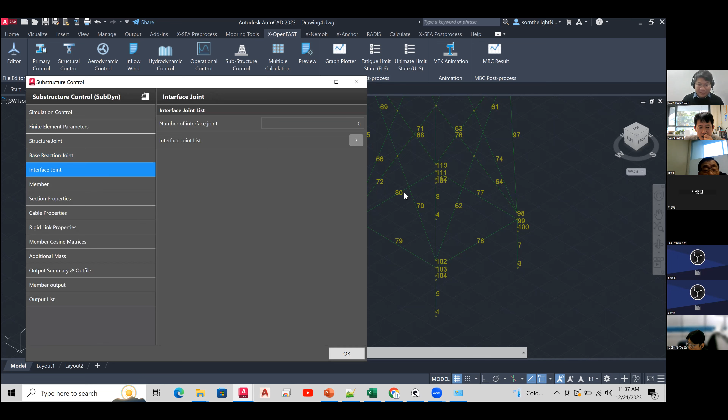The interface joint - this is very important to declare the locations of the points that exchange motion between the substructure and the turbine.

So for the number of interface points in this model, if you rotate a bit to the top and look at the node numbering, we need to include the numbers starting from 13 to 20. This should be inserted to exchange the amount of motion data.

So the number of interface points equals... I will input 8. Hold on, you've chosen one additional element that releases the brace. I didn't choose that, just set it aside now.

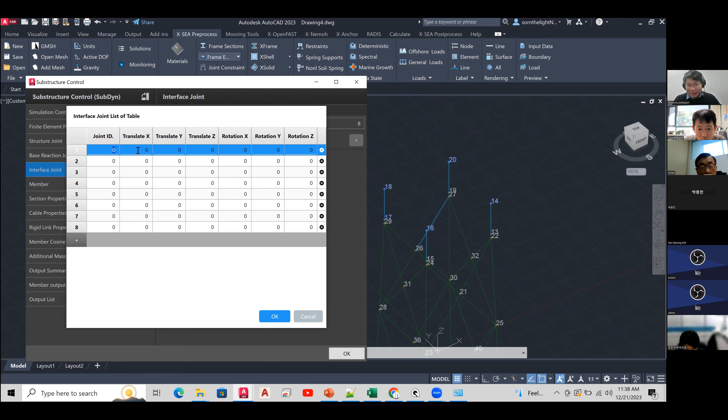Because of the inclined one, sorry sir - because of the other factor, maybe I will choose the very clear one. Actually it's not the element number, sir, it's the node between that element.

Maybe that is 4 - this is 4 elements, right? Referring to the interface points, starting from number 13 to 20. The joint ID starting from 13 should be locked, everything equal to 1, then 14, 1, 15.

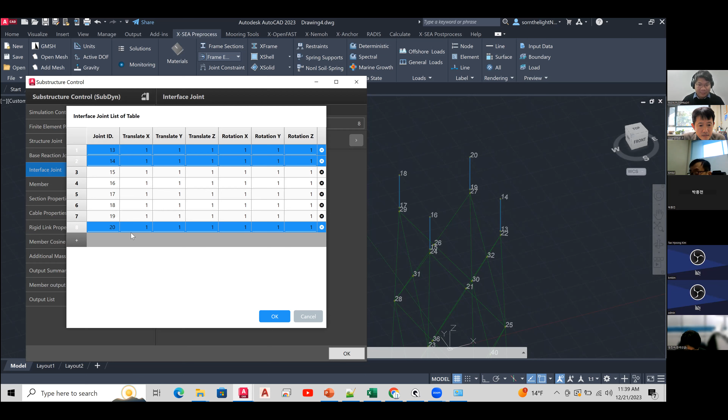Zero is the release, 1 is locked. We need to exchange the motion to the locks, up to 20. Now that's it - everything has been completed for exchanging motions among the turbine, tower, and substructure.

So we move to the member settings. Already everything has been included because the member list comes from the connectivity of the model, meaning no need to declare or modify it. Section properties are the same thing.

We defined this at the beginning - the Young's modulus, shear modulus, mass density, diameter, and thickness have all been integrated here. We don't need to fill up anything for cable, rigid link, or additional items. Everything is finished.

We can go to calculate. After you click to calculate, it will request you to save the model.

Please create one model folder, type anything like OC4 5 megawatt jacket. I will just use number 1 because it will overlap my work, and enter that folder.

Save the model by any name - OC4 jacket.

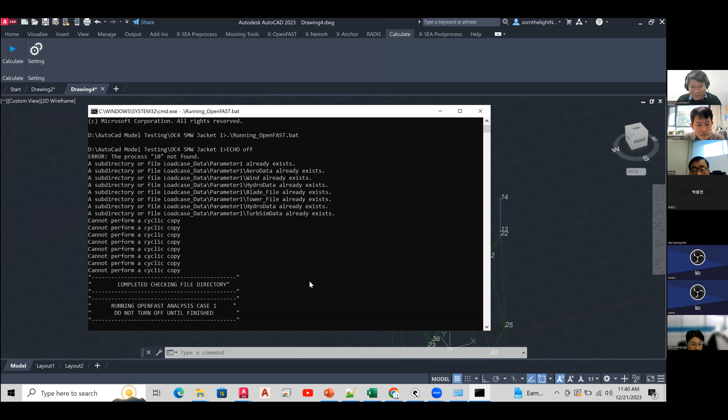Okay, now the program is running. It will take around 10 to 15 minutes, depending on the computer, or longer depending on the situation and time step. So to make it short, I will close and terminate this solution.

Have you loaded the calculation now? Yes, I have it, sir. I will show it. Now the calculation is running, right? By the way, I already terminated it. I will show the completed one, because if we waited 15 or 20 minutes...

So I have the completed one to demonstrate the completed analysis. We just close it, refresh the data, open the model. Actually, this model has been completed by following our tutorial.

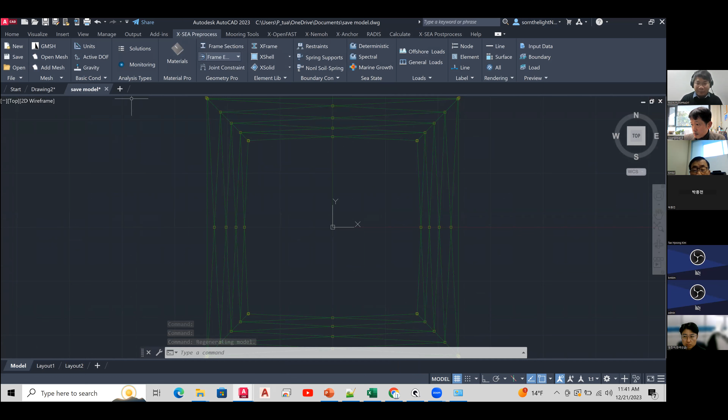If you fill up everything the same as the tutorial, first you can go to OpenFAST post-process. You can see the graph plotter icon on the ribbon. Choose the graph plotter after the calculation has been completed.

The result will show the wind velocity result, as I remember in meters per second. You can choose and plot it from here. Okay, that is the graph plot. Total time step is 60 seconds.

We need to create it first. The target we need to see is the results of the tower base - that means TWR, BS, FXT, until the moment itself. Choose it.

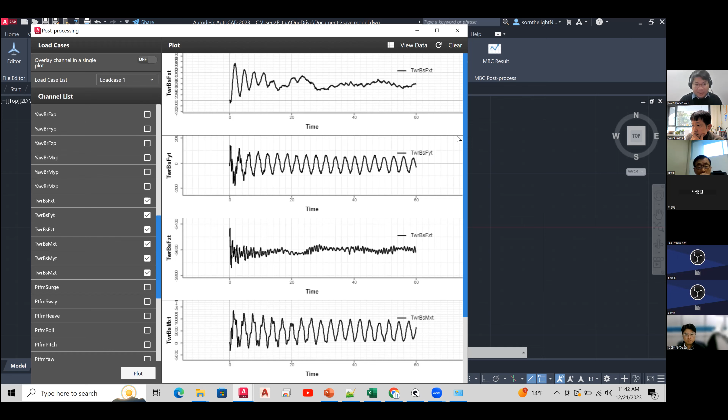So this is our target for the tower base force and moment results. We are able to compare the results and export them by choosing the overlay channel in the single plot on the top of the screen. Select the tower base once again, and for moment, I choose the 6 force and moment items.

6 results have been shown and compared in a single graph. On the top of the screen, on the right hand side, we have the View Data. You can see it's on the top of the screen - they are allowed to be exported in Excel format.

If you prefer to see the results and export them, just read the tower base on the X direction. You can export now by clicking the Excel form, but I prefer to export everything at once - that means going to the overlay channel data.

Just let the program compact a bit. This is a table. We can export to Excel by clicking the Excel icon and saving it. We'll save it, add the same thing, maybe resolve that one.

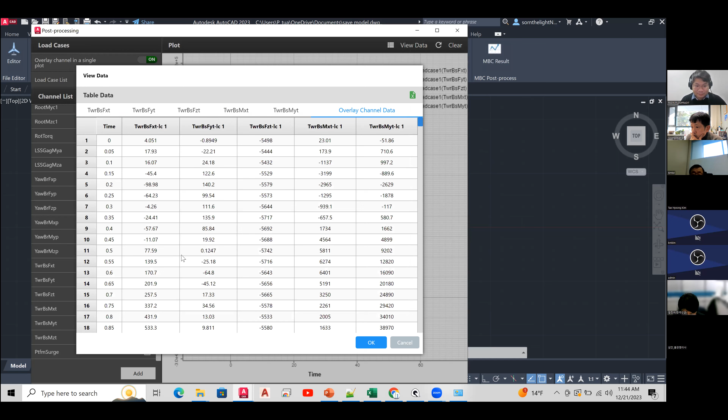Okay, after you save it, you need to go to the folder where you saved it. Now it has been completed and exported, and you can find the maximum value using Excel. So finally, you can get the results of the tower base at the maximum point.

Okay, in this step, as mentioned before, we turned on the VTK animation. That means we already have the animation results also provided in this result. Now let's get to the animation.

Click it - and this is a jacket with the wind turbine and the real data. You can see it's on the button. This is possible to be controlled: the pan view, also isometric, or play with the animation.

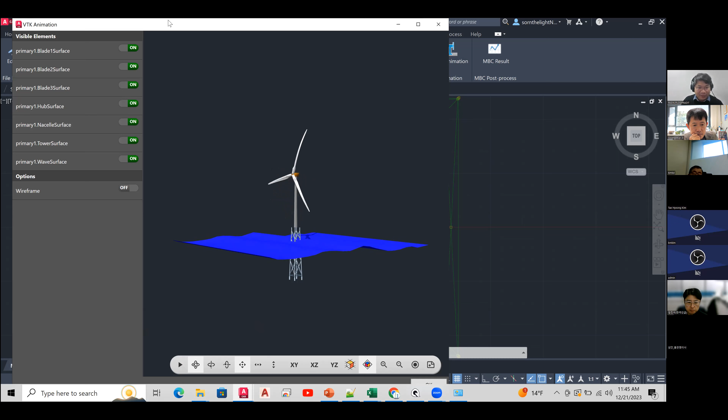You can see that the wave has been moved. Okay, that is just really the final result that we have generated. Just turn it off - if you don't turn it off, the program will be heavy because the file is very huge. As I checked on the file system, the result contains 3 GB already for the animation only.

That's why I do not recommend setting a very high frame per second. So now we get to the X-SEA post-process - this is what we have generated by our own.

Go to the output list, add the diagram category. You can see the local force - Fx, Fy, Fz, moment Mx, My, Mz, or so. And even the displacement results of the jacket structure are included in the table that you can export into Excel.

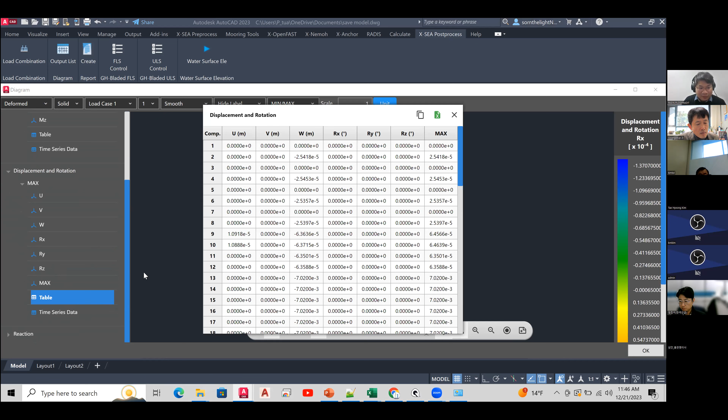So if you prefer to see the results at the first time step, you need to go here - this is the first time step already. Go to the table and then export to Excel. This allows you to save the data, like this displacement data. After you export it, you can open it back later on.

Here you are. This is a conclusion about the U, V, W, X, Y, Z - I mean the rotation of the displacement.

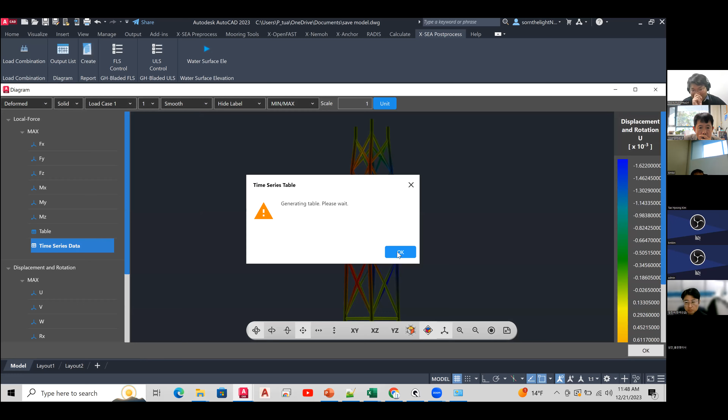So at the same thing in the local force, we have provided the time series data or the table. If you prefer to see the time series data, yes, we already provided it, but if the data is very huge, it should wait a bit, a few seconds, or sometimes 10 seconds or a minute. By the way, to generate that is because it's very huge, it consumes a lot of time. This is the time series data.

And we can allow choosing the location of the nodal, the total. Sorry, this is a local force, right? It's linked to the element. So we can allow using and choosing the number of elements that we prefer to see the results of the local force. And this kind of data, after you export it, can navigate to the X-OpenFAST once again, browse it into the fatigue limit state or the ultimate limit state design for further analysis.

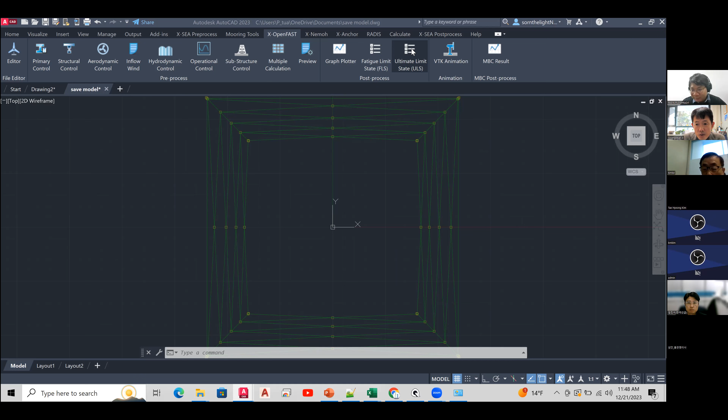We are already out of time for this lecture. We only have like 10 minutes. Oh really? Sorry sir, yeah.

And then for you, because you already explained how to run the programs, you can show some how to investigate the result quickly. So please leave me 5 minutes to finish. Yeah, I think everything is already finished, sir. Oh really? Okay. Because after we get the results of the local force, we can submit into the fatigue limit state or the ultimate limit state design, sir. How long does it take if you show the result for the fatigue limit state analysis? Oh, very long sir, very long. Very long sir. Okay, okay.

Thank you very much for your lecture. You started from the menu and then the model development and the analysis. You covered every aspect of running the X-wind. So let me summarize what we did today.